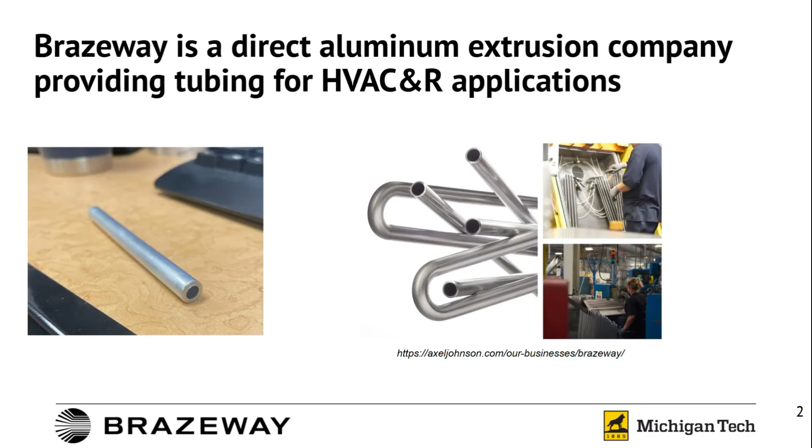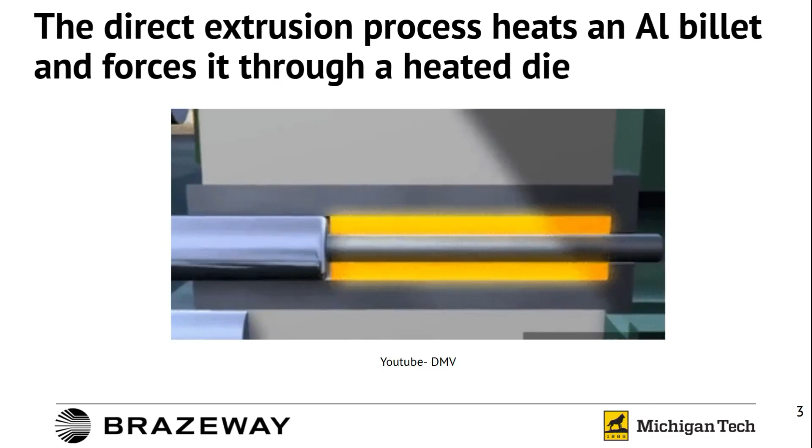Brazeway uses a direct extrusion process. It heats aluminum billets and forces them through a heated die. Essentially, direct extrusion is preheating a billet, pushing it through a complex die, and getting a complex part from it. And in our case, that is aluminum tubing.

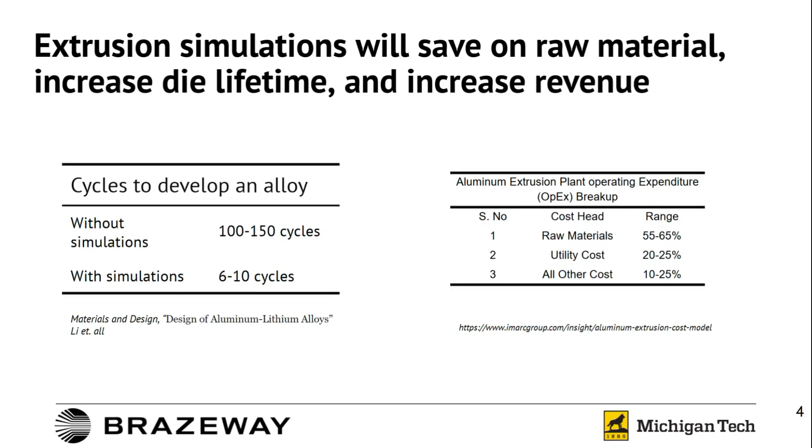Extrusion simulations will save on raw material, increase die lifetime, and increase revenue. It was found in studies that without simulations, experimental alloy development can take up to 100 to 150 cycles. With extrusion simulations, that was lowered down to 6 to 10 cycles. As well as that, being able to use extrusion simulations allows for a reduction on raw materials, utility costs, and production costs. Brazeway wants to increase throughput without inducing hot tearing defects.

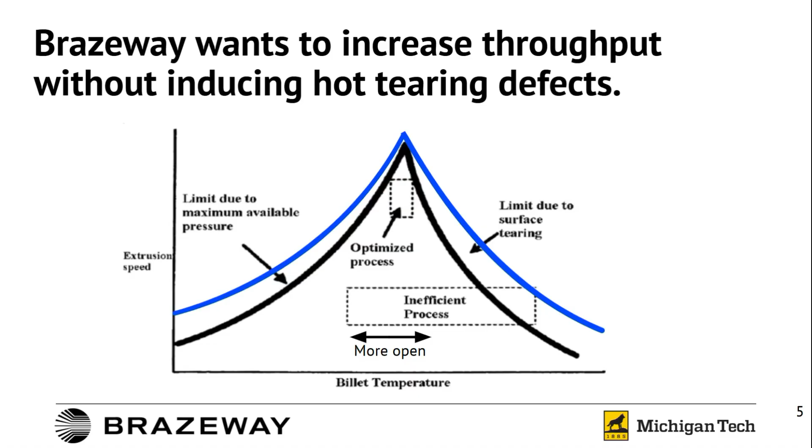One of the parts of our project was making developmental alloys off our 3102 alloy, which essentially involves expanding the process window because we want to run hotter or faster. That ends up having more friction, which can induce hot tearing if it exceeds the solidus temperature. And one of the things we're trying to focus on is creating alloys with higher solidus temperatures.

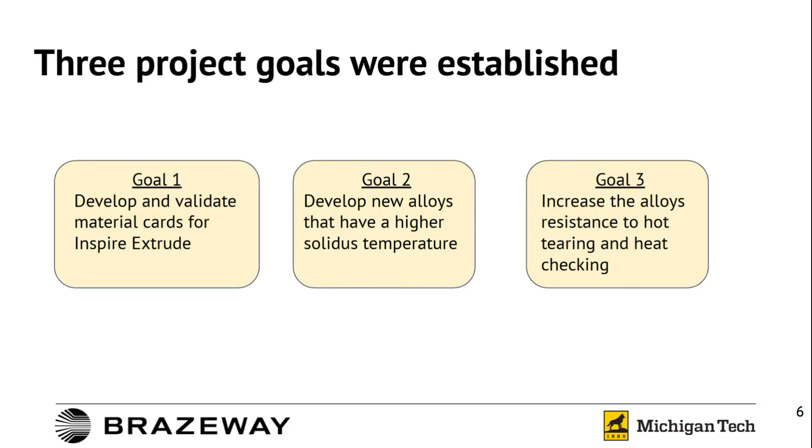Through our project, we had 3 goals in mind. I'll kind of give a rundown of those. Our first goal was to develop and validate material cards for Inspire Extrude. Our second one was to develop new alloys that have higher solidus temperature. And our third goal was to increase the alloy's resistance to hot tearing and heat checking.

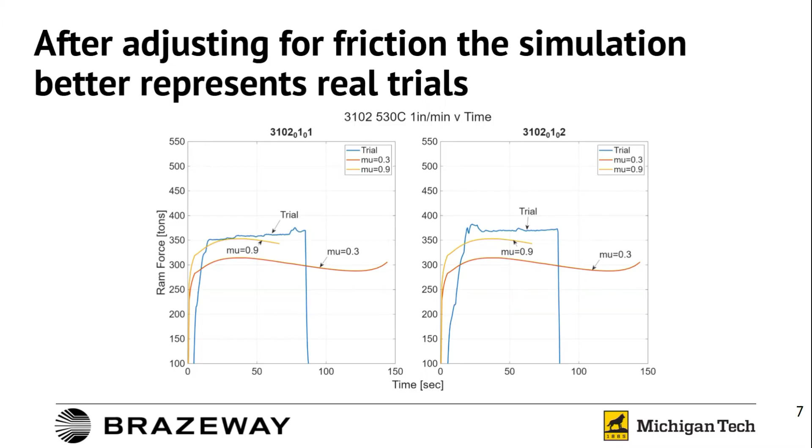So after obtaining thermo-mechanical data from a hot isothermal testing or Gleeble test, we were able to develop material parameters that were used in Inspire Extrude simulations. We then decided to validate that model with a real-life extrusion trial. We did find out that friction does play a large role in our simulation, as our extrusion ratio is extremely high at 225. So we did have to adjust our friction coefficients, but that does give us a better correlation to real life.

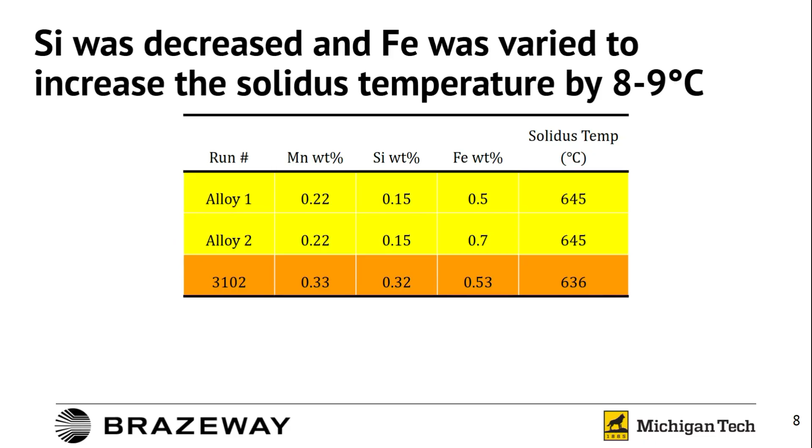Also, in our alloy design, we decided to decrease the manganese content and silicon content, as well as varying iron. That provided an 8 to 9 degrees Celsius increase in our solidus temperature.

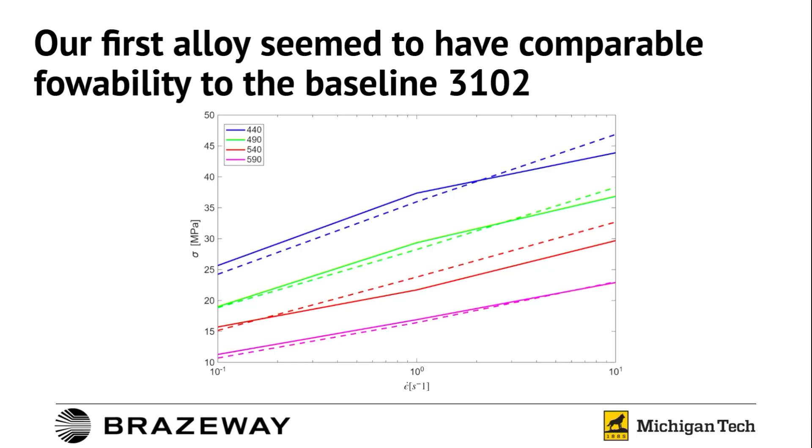We also did some more Gleeble testing and flow stress testing on our first and second alloys. And based on this graph, we can see that the flowability is pretty comparable to the baseline 3102 at high temperatures. However, as the temperature decreases, that flowability does decrease. Even with that decreased flowability, though, we did run the extrusion press at its maximum speed of 30 inches per minute. We did not see any significant heat checking or hot tearing.

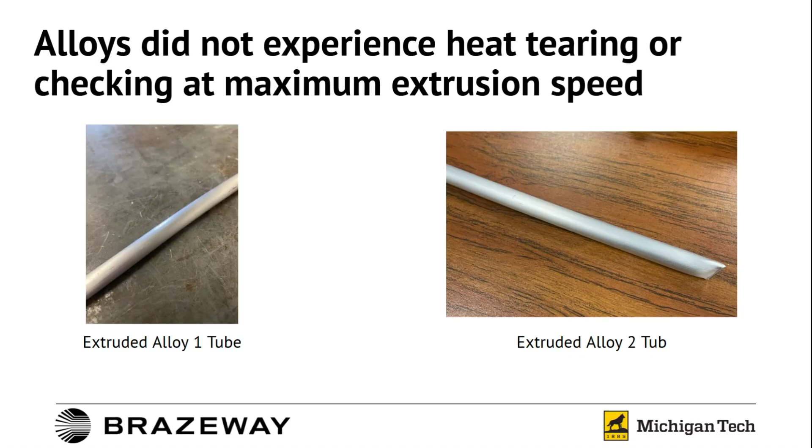So in conclusion, our model was successfully created and validated for Brazeway. Our alloys did in fact have a higher solidus temperature, so goals 1 and 2 are completed. Goal 3, even though these alloys had reduced flowability, the alloy did not experience any significant defects. So this should give a good value to Brazeway, and we'll have to see what they do with that in the future.